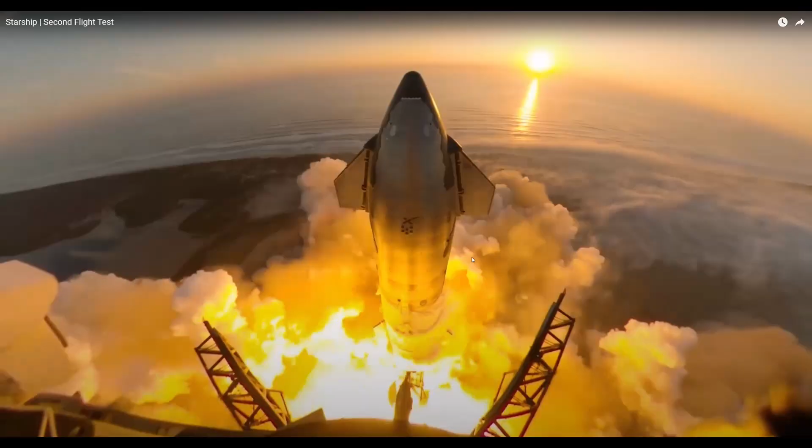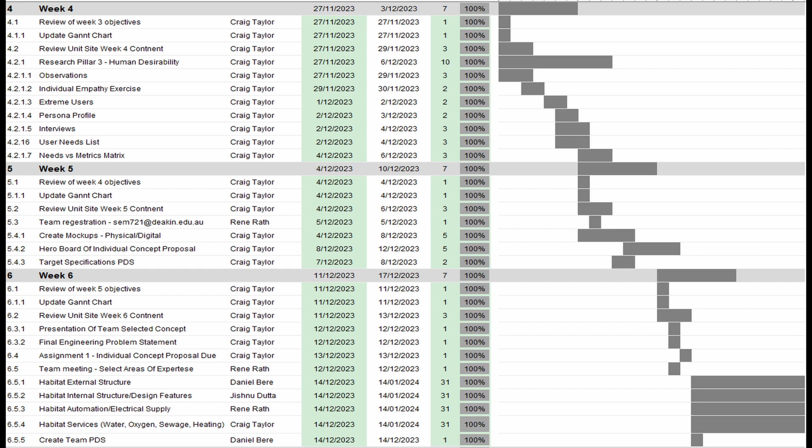SpaceX spacecraft will be used to get there and return home again once the mission has been completed. A Gantt chart was developed to measure progress and ensure that all tasks are completed within the required time frame.

The habitat was designed by utilising the double diamond design process. Each team member submitted design sketches showcasing their individual concept ideas. The habitat design was selected by combining the best concepts of each team member. This enabled the complete habitat to be created.

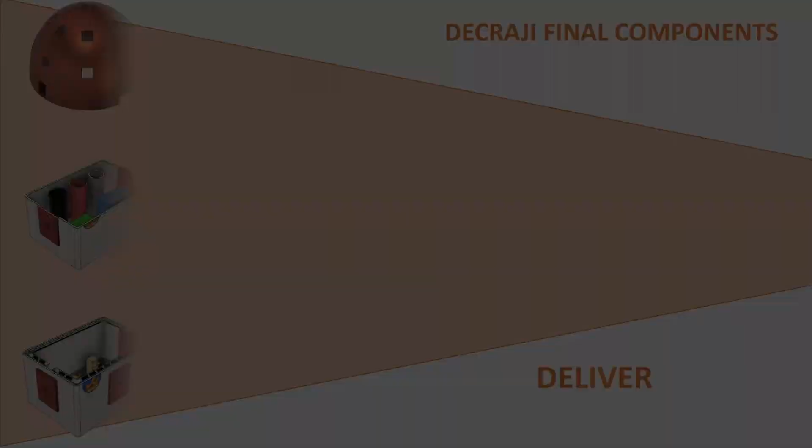The team at Decraji has engineered the best solution for the stakeholder. Background research was completed to determine user needs, market conditions, technical details, and engineering considerations.

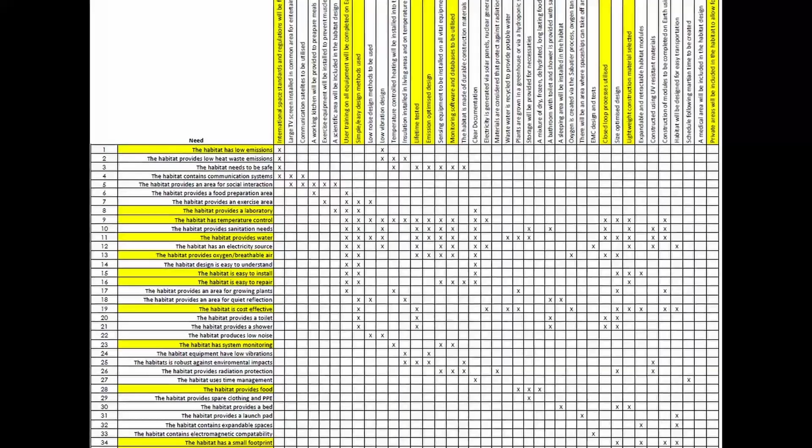We defined 37 key user needs for our Mars habitat. The main needs are lightweight, a small environmental footprint, food, air and water supply, as well as good designed working and living areas, monitoring and redundancy of all technical services, and preparation for all emergencies.

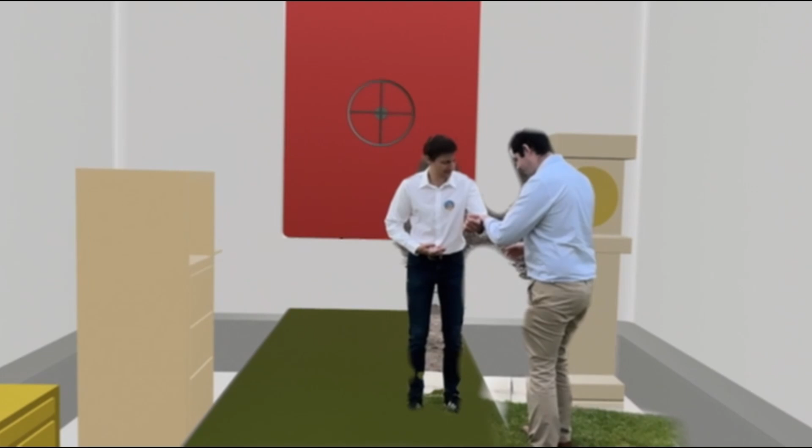To achieve these needs, the habitat is designed according to space standards. It's emission, weight and use optimized. It will get lifetime tested and astronauts will get trained on Earth.

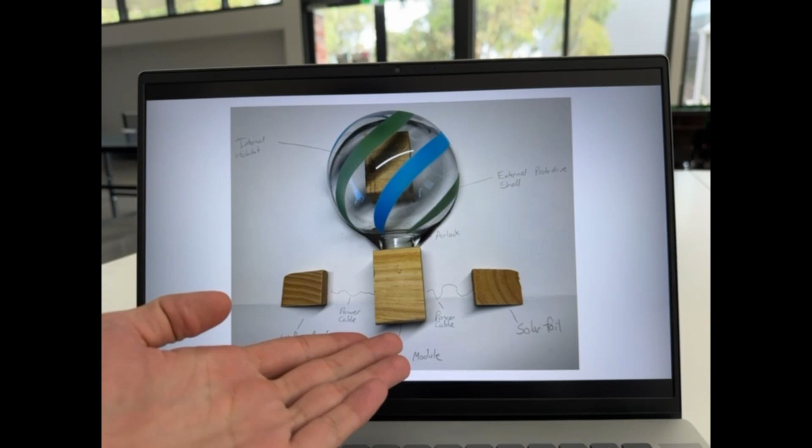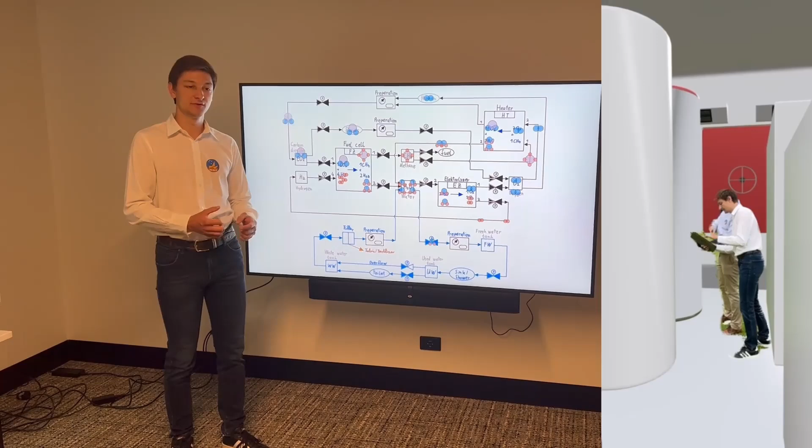Due to the De Craigie closed loop system, the oxygen generation, the water recycling process, the electrical power system, as well as the heat generation is combined into one process, so that we are getting flexibility, robustness, and a buffering system for our Mars habitat.

3 of NASA's nuclear kilopower reactors are enough to produce electricity and heat for the fuel cell and the Mars habitat. As a backup system, De Craigie developed a 10 kilowatt solar foil power plant that rolls out if there's sunlight, and rolls in and cleans itself during dust storms.

The development phase in our project commences with a detailed design encompassing meticulous engineering considerations and rigorous engineering analysis. This project has an entire habitat design.

We have done the design following these principles: manufacturing, reliability, assembly, disassembly, and recyclability. Their essential materials are following on table. The reason why they have been chosen is corrosion resistance, durability, yield strength, and low embodied energy.

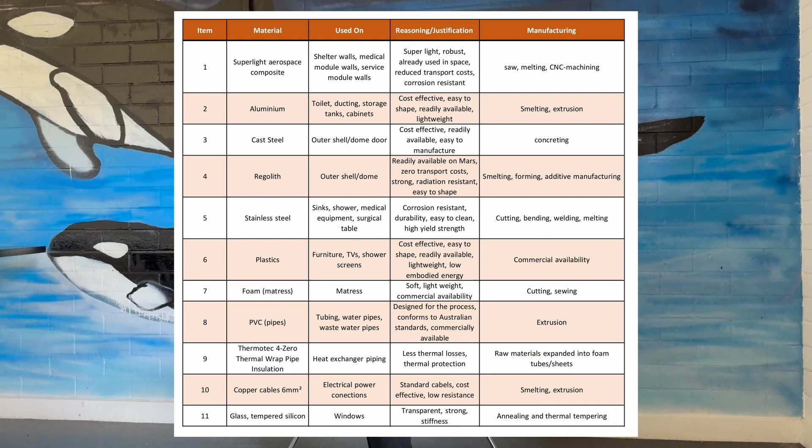The project budget is essential in determining the success of this project. This cost estimation covers all materials and units with profit, overhead, tax, and contingency.

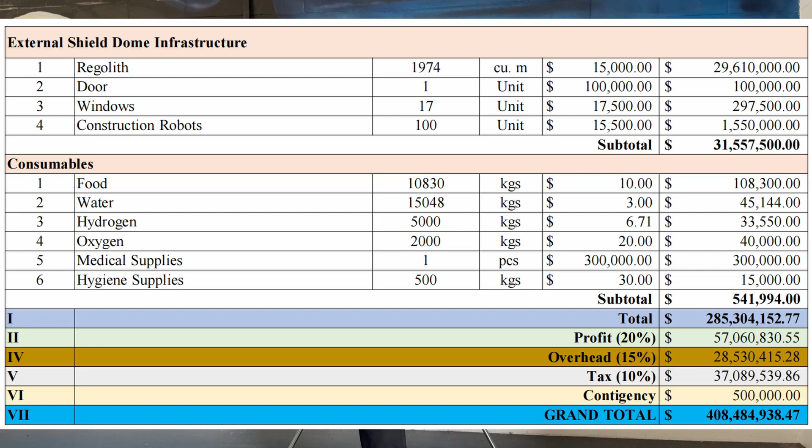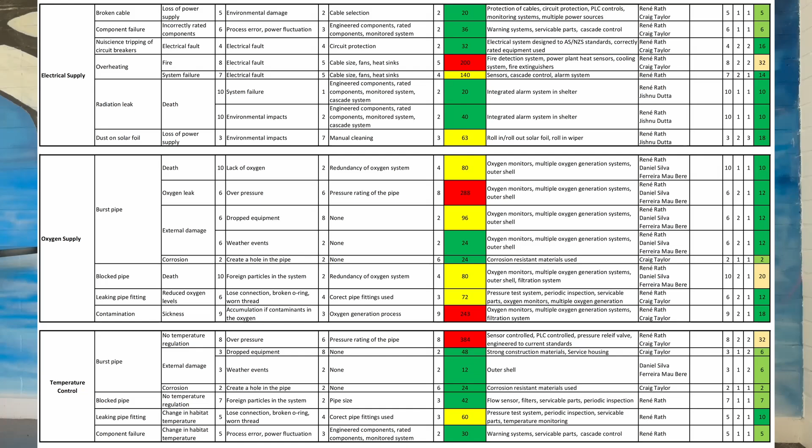In FMEA, we have identified the process function for each potential failure mode, and we have also done recommended actions to lessen the risk priority number in the service system.

Lastly, FEA is one of the most essential infrastructure analyses to implement or design before proceeding to implementation. This project will show the static stress, which consists of displacement, safety factor, reaction force, strain, and stress.

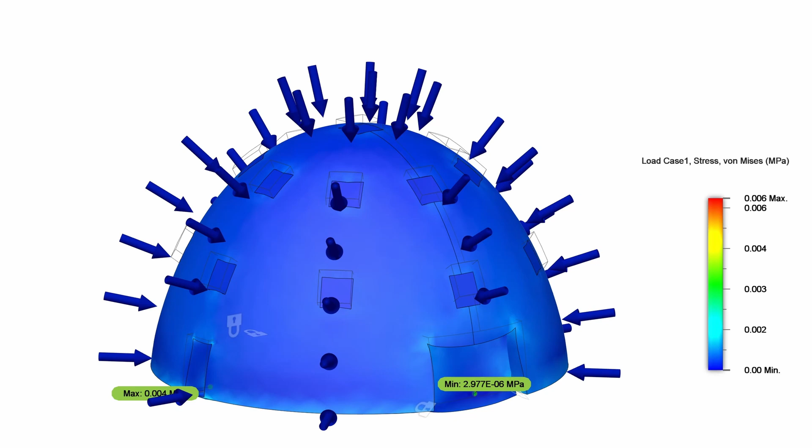The assumption of load design is 70,000 Newton, that is equal to approximately 18,867.93 kg on Mars. Therefore, the simulation design is safe for implementing this project on Mars.

To design a feasible shelter on Mars, we need to think like aliens and gods. The closest approach to build this mindset is by referring to sacred geometry.

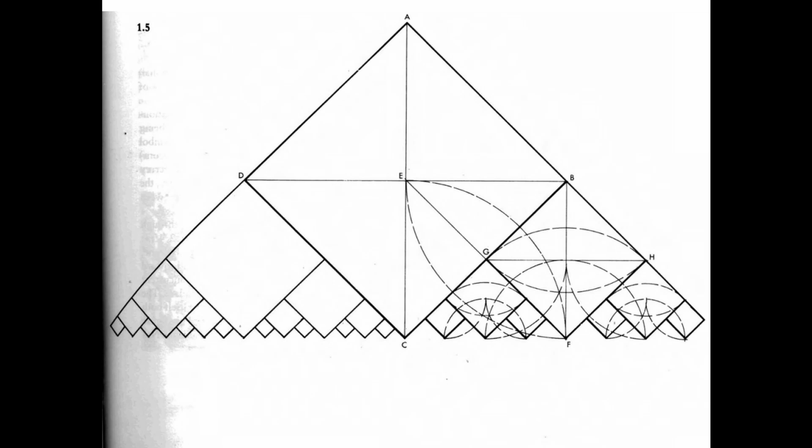The simple concept I used here is the division of unity. If we consider a square to be absolute unity, the division and multiplication of unity can be symbolized geometrically. Finally, these squares are reimagined as individual rooms for my shelter, and we have a shelter that can expand or multiply.

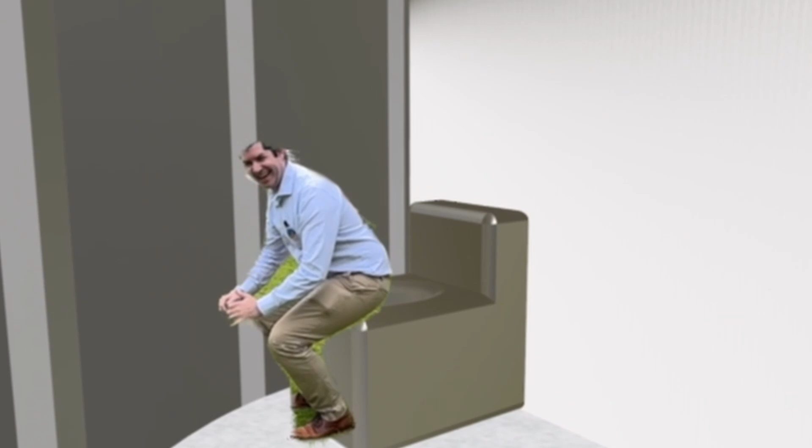This is the main living room where all the 6 members can have meetings. This is the area where our scientists can grow hydroponics and survive. This is the area where we can eat at the dining desk.

This is the main bedroom for 2 scientists. We have 3 such bedrooms, 2 for each. This is a desk for 2 scientists where they can perform experiments and do their research work.

The team at Decraji Space Tech has engineered the complete solution to survive on Mars and deliver all stakeholder needs.